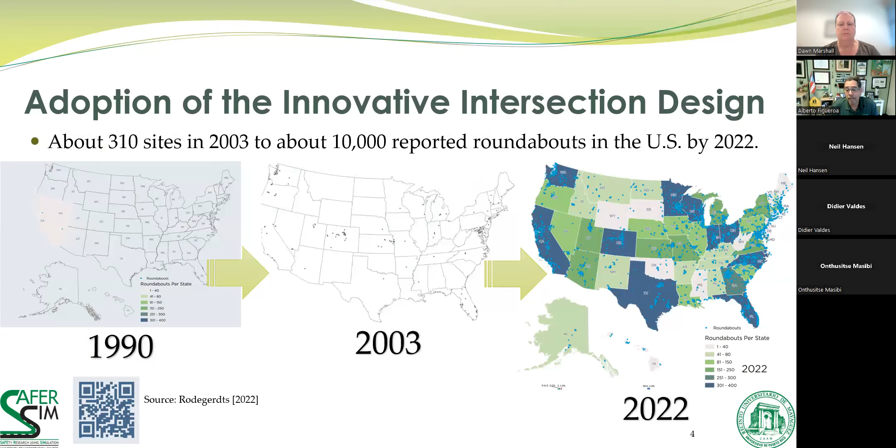This increase in numbers has been documented by NCHRP. There is a website, with a QR code, developed by the people who worked on the NCHRP 572 project. It has an inventory of roundabout locations in the United States, with maps developed over the years. Right now there are about 10,000 registered locations in that database.

The benefits of this modified roundabout design allow a general safety improvement in the number of crashes and fatalities for all users, not only pedestrians, particularly due to two aspects of the design: the reduction in vehicle speeds, which is a major factor in crash severity, and the reduction in the number of conflicts or potential conflicts at the intersection. Comparing a conventional four-leg intersection to a roundabout, there is a reduced number of crossing conflicts, which typically are severe due to the speed of the vehicles and the angle. Also, for pedestrians, there is a potential reduction from 24 to 8 crossing conflicts, which helps the safety level of the intersection.

Nonetheless, there are still some issues or concerns for pedestrians in terms of the geometry of the entry and exit legs and the location of the crosswalk relative to the roundabout. Another issue is pedestrians who don't want to use the crosswalk because they want to shorten their distance and instead cross through the middle of the roundabout.

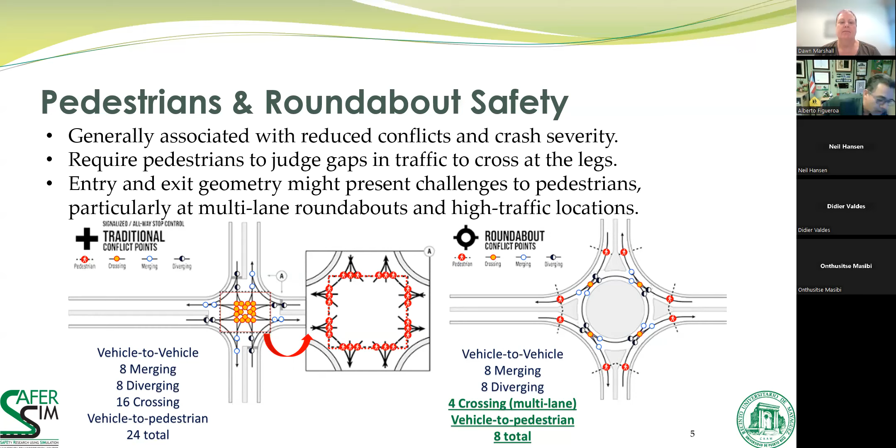In some location, you put a nice, beautiful statue or something in the middle of the roundabout, and people want to take a picture, so they cross through the middle as well. So that creates obviously a safety issue in the design and operation of roundabouts.

But in technical, operational terms, there are two issues we have to look at in the design of roundabouts, related to the entry and related to the exit. This study looked to measure how pedestrians made the decision to cross at the roundabout and how the geometry of the roundabout influenced that decision.

And this topic is highly relevant as these roundabouts continue to be used and implemented more and more by the states. On the entry level, the issue is, while the drivers are slowing down to enter the roundabout, that's a positive aspect for the pedestrian crossing because drivers are slowing down.

But we have to remember that the driver entering the roundabout will be focused on traffic in the circulatory roadway. So the attention of drivers might be looking toward their left to see if they have a gap they can cross without having to stop or yield to other vehicles. And if you have pedestrians coming from your right, you are not looking at them. So you might have a pedestrian coming from your right while you are looking to your left, and you don't see them. That's an issue that has been identified in the literature.

But on the other side, on the exit of the roundabout, the literature has shown that exit movements are more critical for pedestrians, because pedestrians still need to analyze traffic for gaps and analyze the speed, the time, and the distance of the vehicle from the crosswalk in order to safely cross at the roundabout.

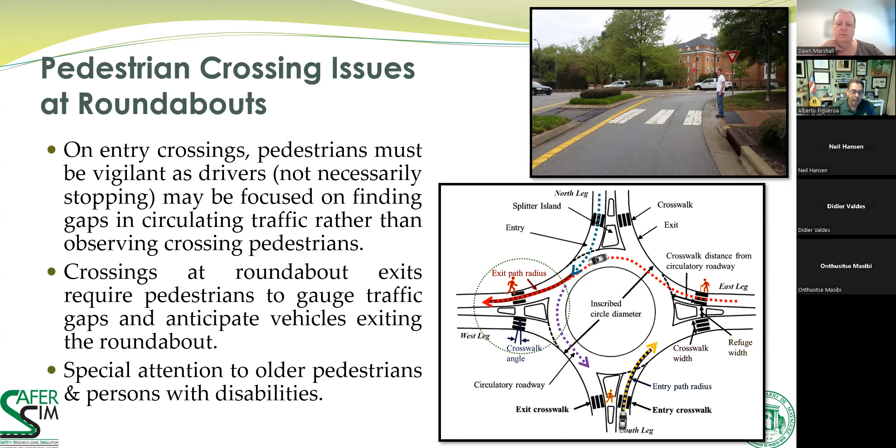This is the fourth study we have done here in Mayaguez using virtual reality simulation. The development of the technology has been a huge advantage for doing this type of research. Obviously, you have to understand the limitations that the technology also allows for studying in a controlled environment. And obviously, we don't want to forget that this is a simulation.

So how are you able to mimic or establish real life conditions? Obviously, that's the main challenge as a researcher.

But many people, especially colleagues in University of Iowa, Dr. Kearney and Dr. Plumert, have used virtual reality and shown that the technology can be used to study human decisions. Actually, in our first study, we had so much help from Dr. Kearney and Dr. Plumert that they allowed us to grow in this type of study and use the technology.

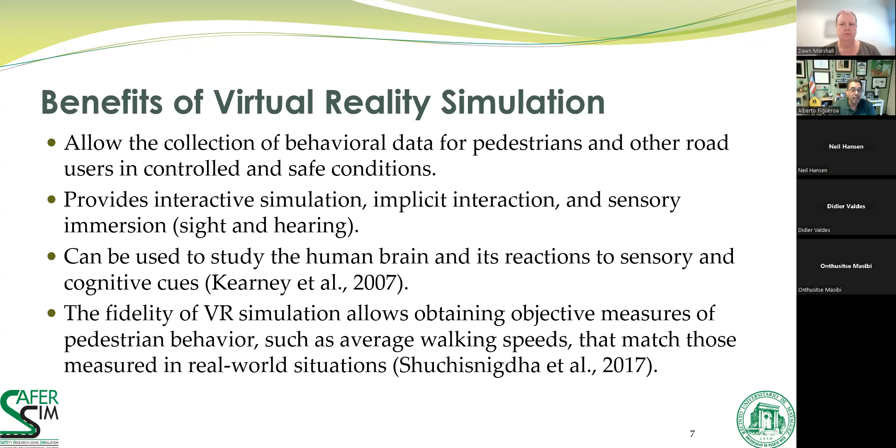But other researchers as well have demonstrated the capability of virtual reality, understanding their limitations and their capabilities to do this type of project. And I wanted to quickly talk about those three projects because it is useful to compare our results on this project.

The first one, we analyzed the gap acceptance and walking speed of people at a mid-block location on one lane and two lane roads. We measured walking speeds and gap acceptance, and found a range, for example, from 4.1 to 4.8 feet per second. There were several factors: age, gender, the number of lanes (one versus two), and traffic with constant gaps.

In our first experiment, we analyzed two situations: random gaps and constant gaps. We didn't do it thinking of autonomous vehicles, but in reality it is a nice feature to have traffic on constant gaps, thinking of a platoon of autonomous vehicles. So we analyzed short gaps, constant gaps, and larger constant gaps to see the effect.

Obviously, the walking speed -- people perceived those gaps and adjusted their gap acceptance and their speeds at those locations. The vehicle gaps were about 4.5 seconds on average. We also analyzed the probability of being hit, which increased with age, with higher vehicle speed, and with shorter vehicle gaps.

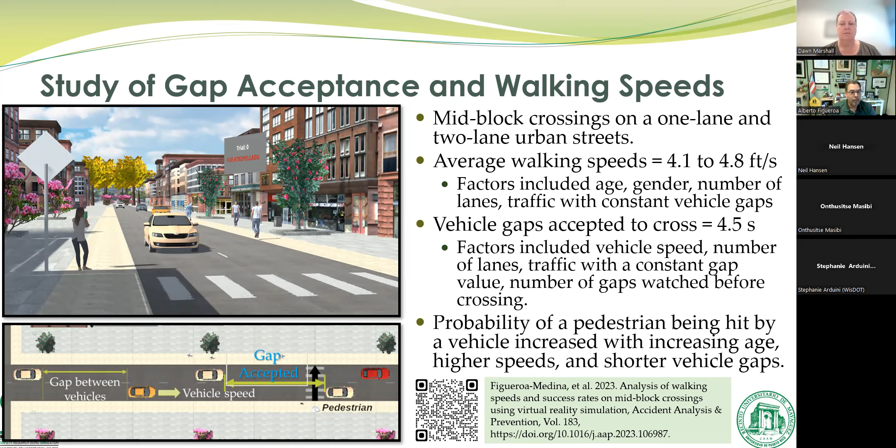So the probability increase was obvious -- those three factors are very apparent once you see and analyze them. If you want more details, you can go to the SaferSim website. We published a paper in Accident Analysis and Prevention about the results of this project.

The second one, we upgraded the problem, and we decided: okay, we have the mid-block location, and now we have the straight segment.

What about if I have a person on a connected environment and they have a tablet-like instrument that tells them information about when it's safe or not to cross? So we added a RIAS, a road information assistance system with two levels.

One just showing symbols on the screen, pedestrian symbols of walk and stop. We did it again on 1 lane, 2 lane. I'm showing you the 2 lane setting. People use this on a simulation. They have a tablet, they see it on the screen, and those symbols change from walking to stop depending on the distance of the vehicle. We calibrated that device based on the actual walking speed of that person, focusing on enough time for the person to cross at that speed.

On the complex RIAS, we added more information: the speed of the vehicle per lane, the time it takes the vehicle to reach the crosswalk, and also the distance. At the beginning we called it complex because you have more information to understand, to analyze, to decide whether to cross. So we wanted to check if this, instead of helping, would become a distraction to the person trying to understand what this device is telling them, or decide not to use it and cross anyway.

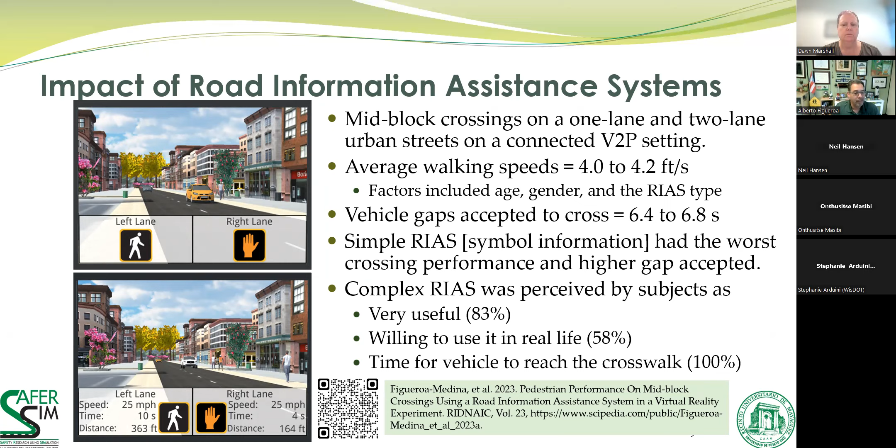The third project we moved to intersections. This is a project we presented one month ago, related to right turning lanes. We decided to design a channelized right turn lane, and wanted to check if the length of the lane, the radius, and the trajectory of vehicles entering that lane had an effect. As you can see, there were two trajectories, one yellow and one blue, to test if those factors affected the decision or the speed.

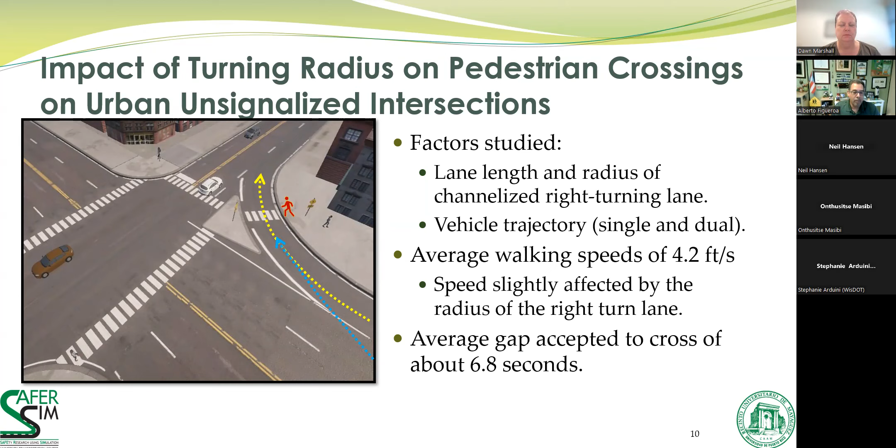The speed was basically similar to the previous example, 4.2 feet per second, with a slight effect from the radius of the turning lane. We used 60 feet and 30 feet to make those adjustments. The gap was also very similar to the previous example, 6.8 seconds. So compared to the straight segment, those locations were more complex for pedestrians.

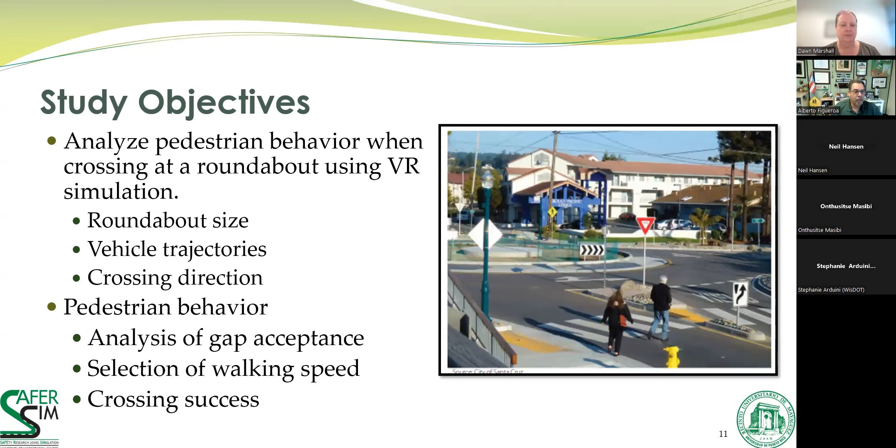Then we moved up to roundabouts. As we progressed in the study, we decided to make this more complex - I guess that's the vision of a researcher. We wanted to increase complexity, and with that we also ran into a lot of issues. We wanted to see if the size of the roundabout, the trajectories, and the crossing direction had any impact. We did the same analysis, measuring speeds and gaps, and used the HTC Vive for the equipment - the same one we used for the other three projects.

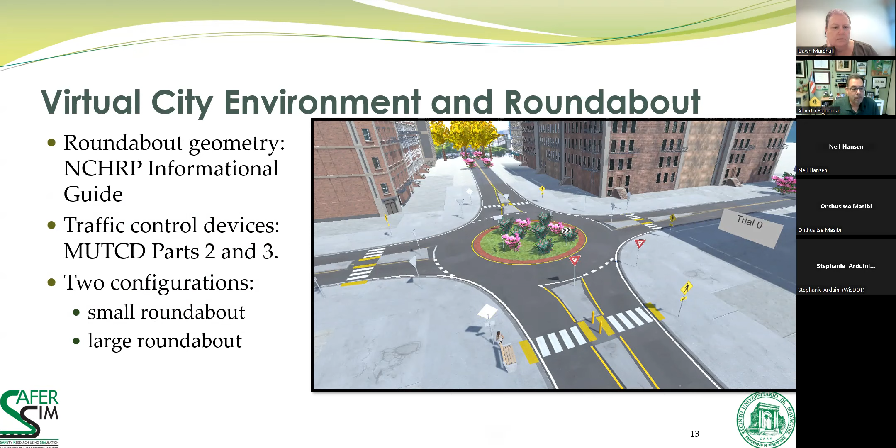We designed the roundabout using guidance from the NCHRP guidebook, and for traffic controls we followed MUTCD guidance. We have two sizes of roundabout, small and large. NCHRP has different categories: mini roundabout, single lane roundabout, up to multi-lane roundabouts. Our small roundabout at 87 feet can be considered a very large mini roundabout or a very small single lane roundabout, so we wanted to be at that limit. Then we went to 120 feet, a big single lane roundabout, to see if those extremes had any impact.

The other elements were based on design guidance, so we followed those as much as possible within the design. We used AutoCAD, and then those were transferred into Unity, the Unity engine, to code and program the scenarios.

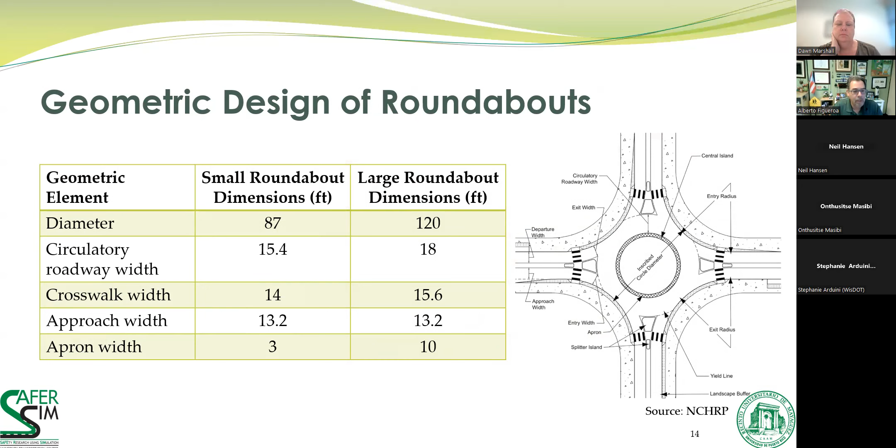As you can see, those were the design features of the roundabouts. So the small roundabout and the large roundabout become a configuration for the experiment, and we have two additional factors: the direction the pedestrian was walking, either toward the median or toward the sidewalk, and also a single and a dual trajectory, which I will show you very quickly.

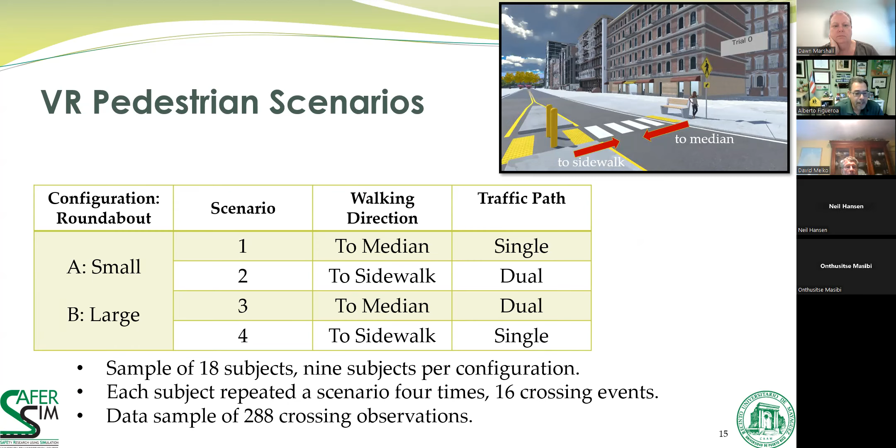We had a sample of 18 subjects at the end, nine subjects per configuration, about 288 crossing observations, and traffic flow through the roundabouts. We used random gaps from 2 to 8 seconds. Traffic speed, we decided to have a very low speed flow, 15 miles per hour. It was constant, we didn't want to add it as a factor in the experiment. And we had 3 vehicle generation points with 2 potential conflicts with the pedestrian.

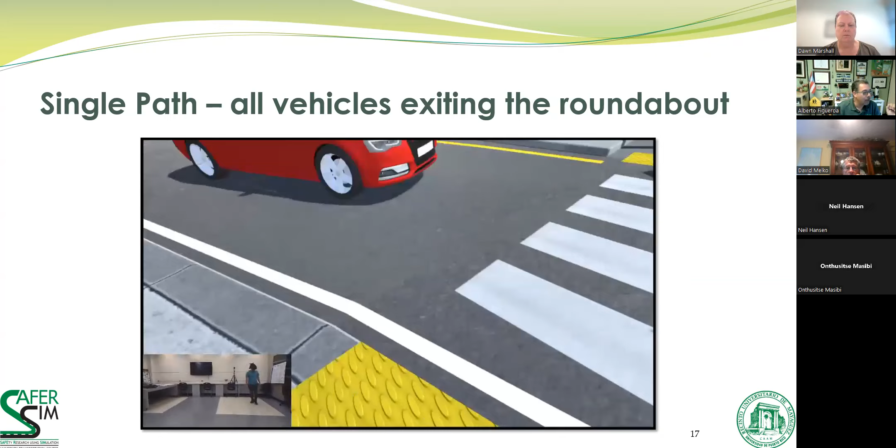Here's a quick video, but I need to change the pointer. Okay, so you can have a perspective of what the pedestrian was watching in the simulation. Remember that the pedestrian is on the south leg looking, in this case, toward the north side, and now he's looking at the west side, and then he has to check traffic. All the vehicles coming from the north and on the west side are exiting toward the south leg, so all vehicles are exiting. Remember that the first one is going north, so those are not coming through the crosswalk.

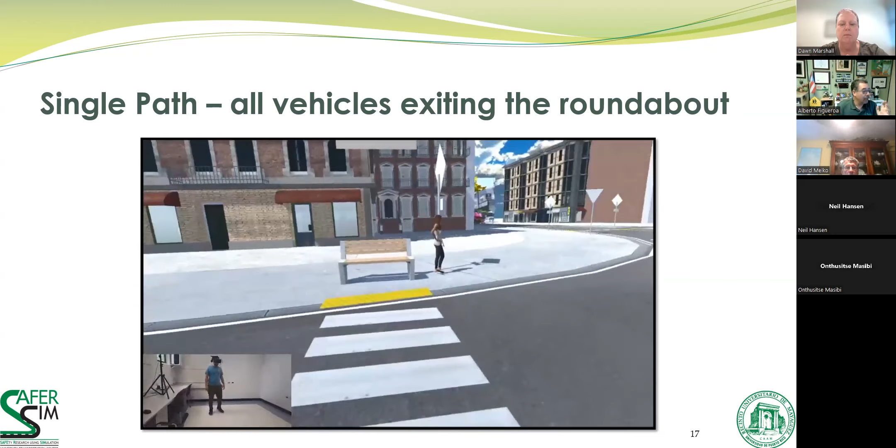So that was the first factor, the single trajectory. And then we added a second, we call it the dual trajectory. We have the same blue vehicle that didn't have any impact on the pedestrian, but it was added so people can see traffic going through the roundabout.

Now you have the vehicle in red having two choices, either to exit or keep the circulatory roadway. So we added some complexity to the decision. Now the pedestrian has to understand if that vehicle coming from the north is exiting or keeping the circulatory roadway, and we apply the same from the west. So obviously it was more complex in order to program the gaps.

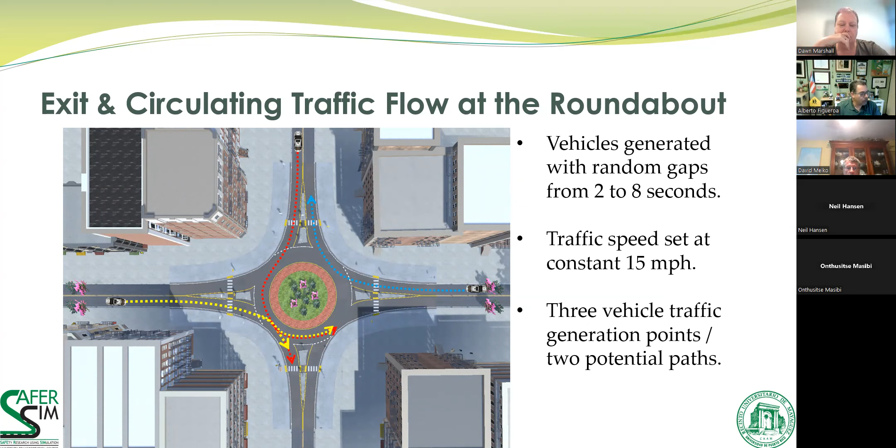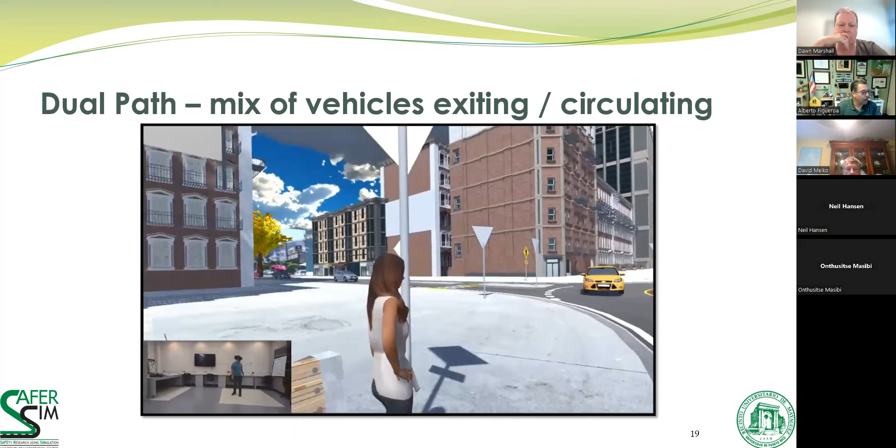So we can obviously measure the gap that the pedestrian was selecting to cross. As you can see in the video, now we have vehicles coming toward the crosswalk or keeping the circulatory motion on the roundabout. So now the pedestrian has to understand what's going on and make a decision to cross or not. Okay.

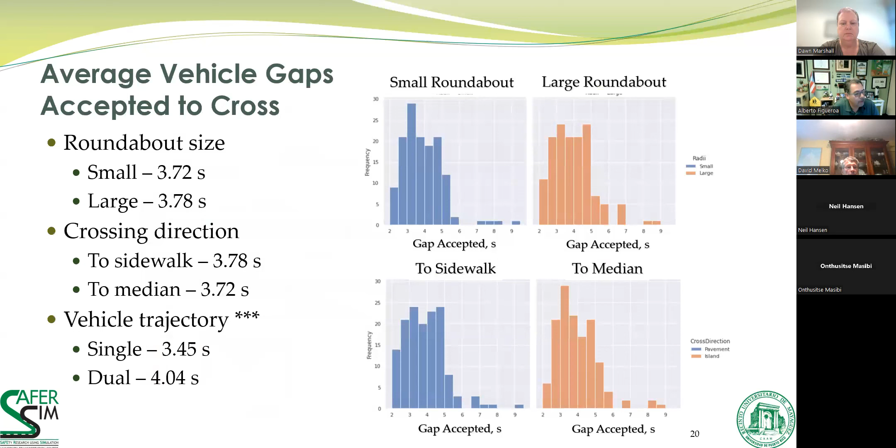So let's go into the results. When we look at vehicle gaps, we analyzed the three factors: roundabout size, crossing direction. Those two didn't have any impact on gaps - as you can see, statistically, those were similar, the distributions were similar. But the vehicle trajectory, now having that issue of trying to understand if the vehicle is coming your way or not, that level of complexity increased the gaps that people accepted to cross. It added basically half a second to the average value for pedestrians in those situations.

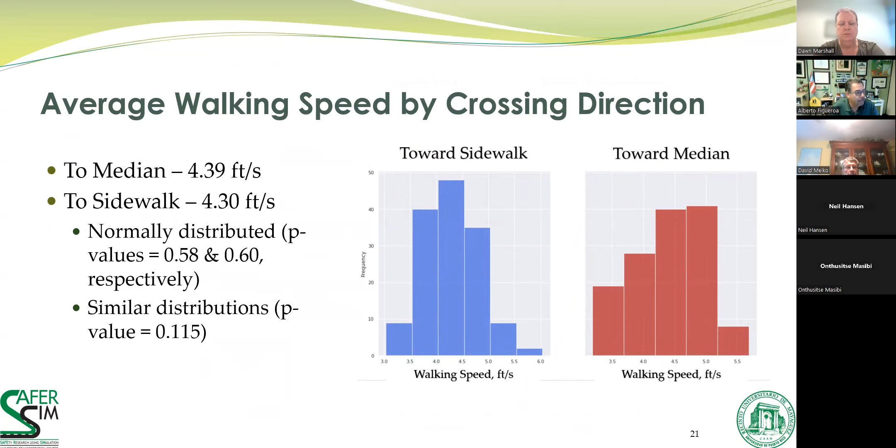In terms of average walking speeds, the direction of the crossing didn't have any major impact. Our initial hypothesis was that because of the direction people had to look, turning their heads and so on, it might have some influence on their behavior, but we found out that that was not the case.

The size of the roundabout didn't have any... well, they did have some effects, sorry. They are different - the issue is that they were not normally distributed, so that was a surprise. In other projects, we found some normality, but in this case there was no normality, though they were different. So there was some effect in terms of the roundabout size. People tend to walk faster on the small roundabout, probably due to the size - they felt the vehicles were closer to them.

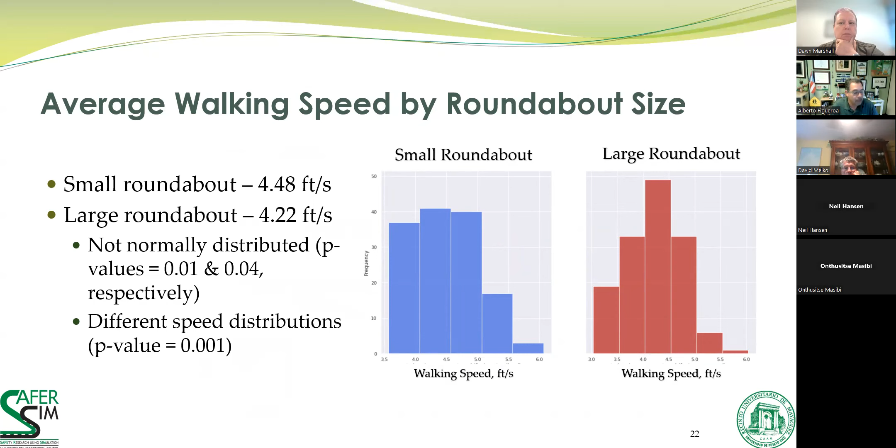The large circulatory roadway obviously gave them more, let's say, perception of safety, because remember, the speed was the same. So it's not like in reality where a large roundabout would make people go faster - that was not the case in this experiment. We decided to keep the vehicle speeds the same, so it's a factor of the size and the distance to the crosswalk.

So in conclusion, we find out that the size of the roundabout influenced the walking speeds. Our assumption is that people felt safer conditions on the large roundabout, and therefore they decided to use slower speeds. The issue is probably the large circulatory roadway allowed them to see the vehicle with more time to decide whether to cross or not.

Those walking speeds were comparable to the other projects. There were no major differences. Older subjects had lower walking speed as expected, probably half a foot per second less than younger people.

The gaps accepted to cross were not influenced by roundabout size or walking direction, but they were affected by the trajectory. We think it presented more difficulty to pedestrians, so they required a larger gap to cross. There were 9 collisions with vehicles.

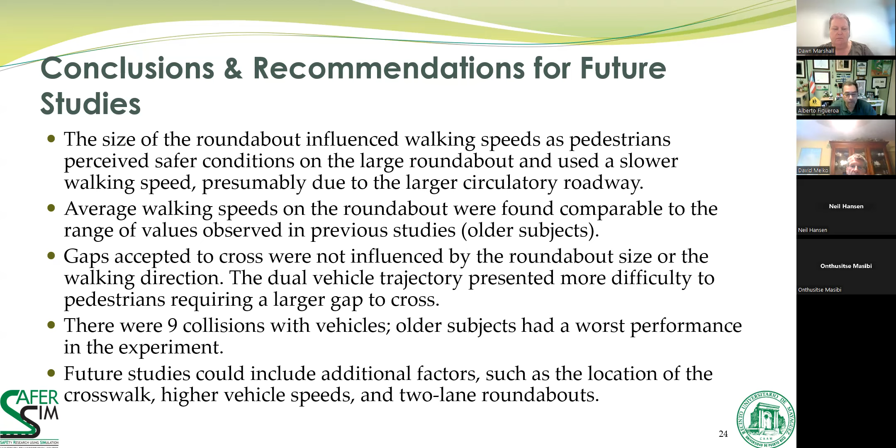We can have higher vehicle speeds, higher than 15 miles per hour, and we can also add two-lane roundabouts. That will make the analysis and coding of the vehicles more complex, obviously.

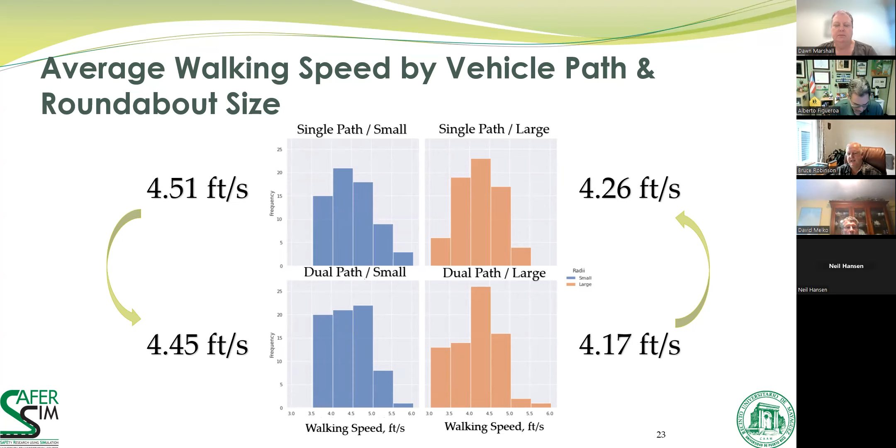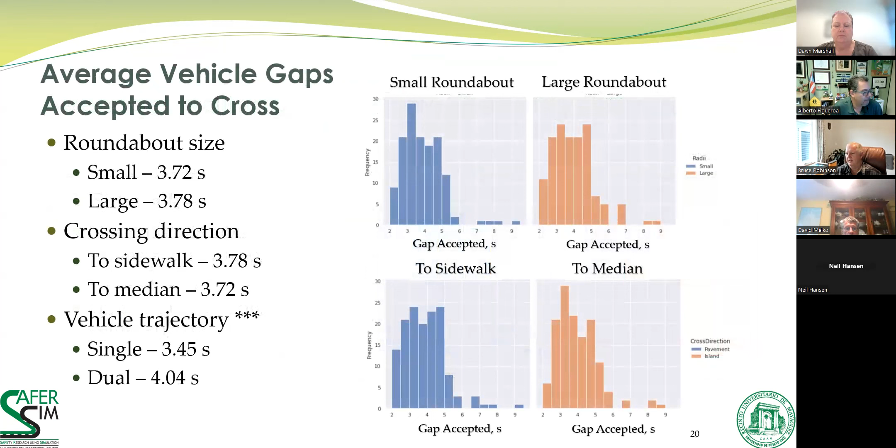And okay, so true gap acceptance. My other question was, when you had on the exit a vehicle choosing to either exit or continue to circulate, were the indicators on for the vehicles? Was the subject pedestrian reacting to indicators on the vehicle, or were they just trying to guess?

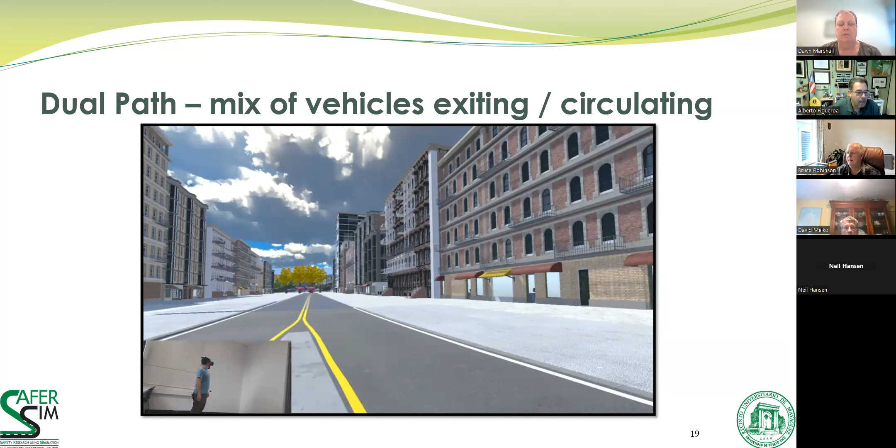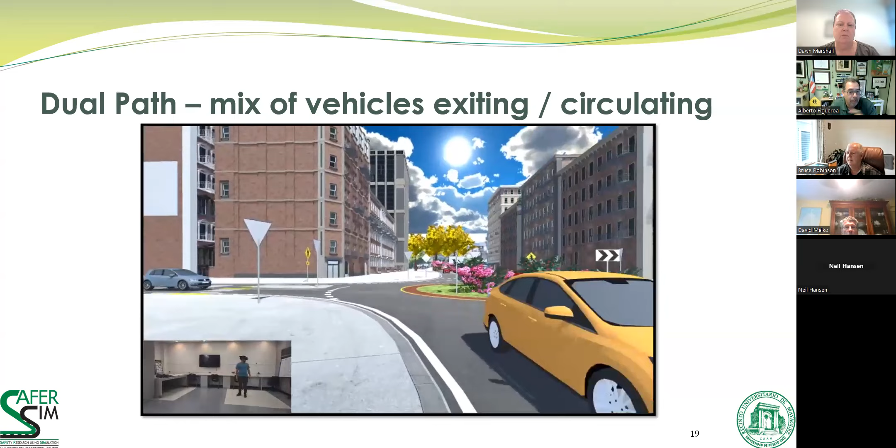No, there was no way to know, because we switch colors, we switch the two directions. So it was up to the pedestrian to decide. There might be a learning curve as well, because the path is programmed in the simulation, but there's no other clear indication to tell the pedestrian this is a vehicle that is going to go exit or keep on the circulatory, because it was randomized in the experiment.

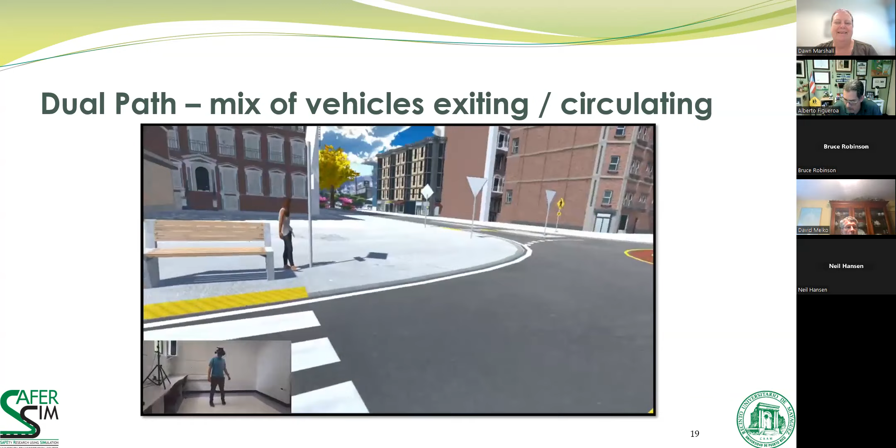So no turn signals, Alberto? No, right, no turn signal or anything like that. Yes. Okay, thank you. I guess colloquially I can say we follow Puerto Rico standards.

Thank you very much. Any other questions? Okay, I don't see anyone unmuting and I don't see any typing.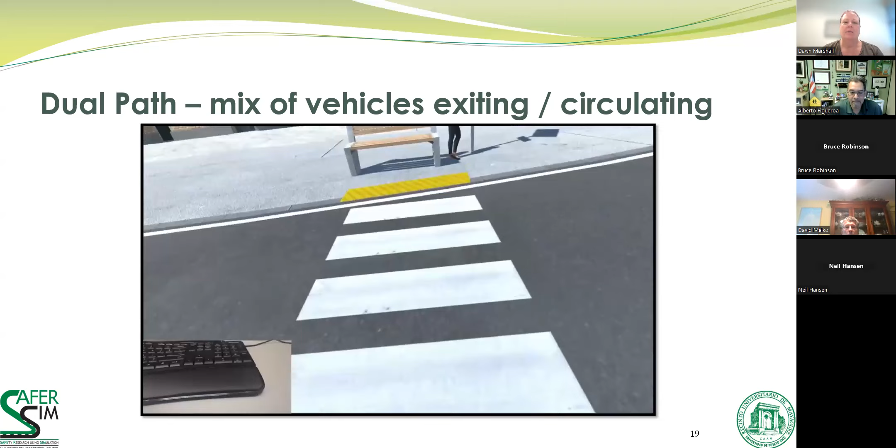Alberto, thank you very much for a very interesting presentation and for connecting it back to the other projects, because I see them as all a series of projects where the results are interconnected, or at least interesting together. So thank you, that's a full story of the progress in SAFER-SIM when you try to increase the level of complexity in the next research and so on.